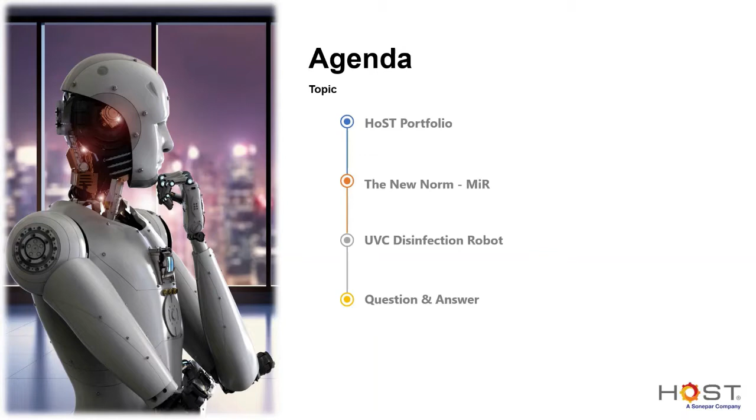Okay, so here we go. For those who have not heard about us before or have been wondering why we are called Host, Host was set up by Mr. Ho Soo Tin. That's where he came up with the name Host, H-O-S-T. He brought Allen Bradley from the US to Singapore in the early 1980s and set up the company in 1990 as Host Enterprise. Since then, we have been the distributor for Allen Bradley products, which is now known as Rockwell Automation. We are their exclusive distributor, which all technical and commercial matters on Rockwell Automation products goes through us locally.

Some of the key milestones: in 2014, we joined the Sonepar family and expanded our distribution network as one of their global operational companies. In 2018, we realized that the industry is evolving and we are going to evolve together as well, by offering more products and solutions. We changed our logo and added portfolios like robotics back then in 2018.

An overview of our parent company, Sonepar. Sonepar has been around for more than 50 years. In 2019, we achieved 24 billion euros in group sales with 48,000 associates worldwide, 3,000 branches in 48 countries. We are one of 145 operational companies globally focusing on distribution of industrial automation and electrical products. Currently, we still hold the position of world leader in B2B distribution of electrical products and solutions globally.

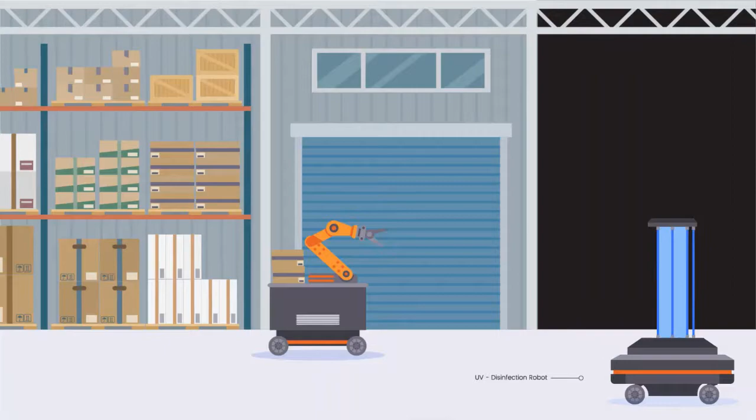Three decades of experience in industrial automation has made Host, part of Sonepar Group, the trusted and leading partner of companies looking for holistic solutions to their industrial needs. Businesses like yours no longer need to rely on expensive and cumbersome manual processes. With our cutting-edge solutions on carbon footprint reduction, energy management, production and operation, smart manufacturing, robotics, network, cybersecurity, we deliver customer-centric value to address evolving business needs. Get work done quickly. Contact us today.

This is the last slide of the introduction. We have currently moved 2 years ago to a bigger place, joining our 3 other Sonepar operational companies in one office. Now I'll hand over to Clement from MiR to talk to you about the new norms.

Clement has more than 15 years of experience in the automation industry, and he specializes in robotic applications and safety systems in his previous career. So Clement, please.

Good day, everybody. Many thanks to Host who organized this webinar, which is pretty much relevant to the situation nowadays that we are facing with regards to the COVID-19 situation. Therefore, very much appreciate that.

And I'd like to talk about our MiR autonomous mobile robot.

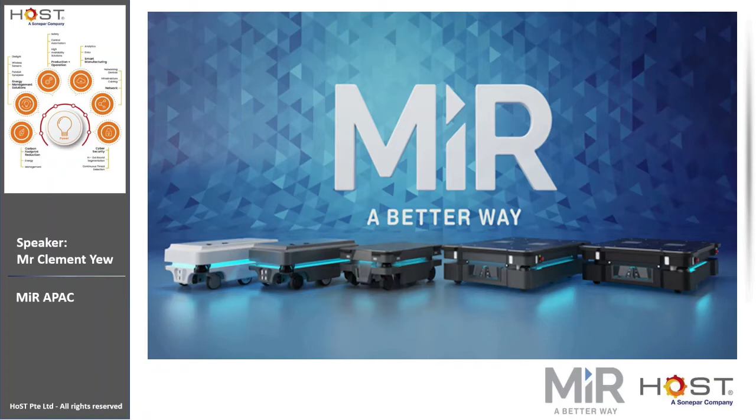But there are also cases where the COVID-19 rises again. That's actually happening in Australia.

So they extended the lockdown. They reinforced the lockdown as well. So therefore, new norms have been created due to this situation. So what are the new industrial norms due to COVID?

If you look at the exhibitions nowadays, these are all being cancelled, especially for the very famous ITAP show, Semicon show. These are all being cancelled. However, digital media marketing has taken place more, which has overtaken such roles for marketing purposes.

In terms of meetings, I think most, if not all of us, have already been using Zoom or Teams as a platform to do online meetings as well. And the frequency of cleaning in the workplace or in public venues has been more and more frequent, and actually it's quite intensive for workers to do it.

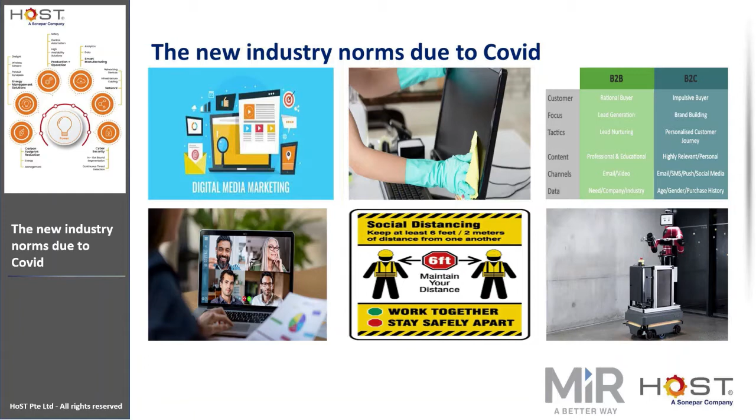But is this new norm really new to the industry? I think this is the biggest question. In my perspective, as we are all industry people, I think Industry 4.0 is no stranger to all of us.

And when we talk about Industry 4.0, we talk about autonomous systems. When we use autonomous systems, it means a less labor intensive production environment. And when we talk about a collaborative system as well, this is to ensure that less humans are involved, because some of the labor work is inevitable. Human involvement must still be there. However, whenever possible, collaborative systems will be implemented to ensure this.

So this can actually ensure some social distancing. Safety is always the top priority, whether it's COVID or not, where machines coexist with human beings.

In terms of data analytics, when we talk about contact tracing, basically we are talking about traceability, track and trace purposes, which is a requirement for Industry 4.0 as well. And the system will need to be flexible and scalable as well. So machines should be of an open interface.

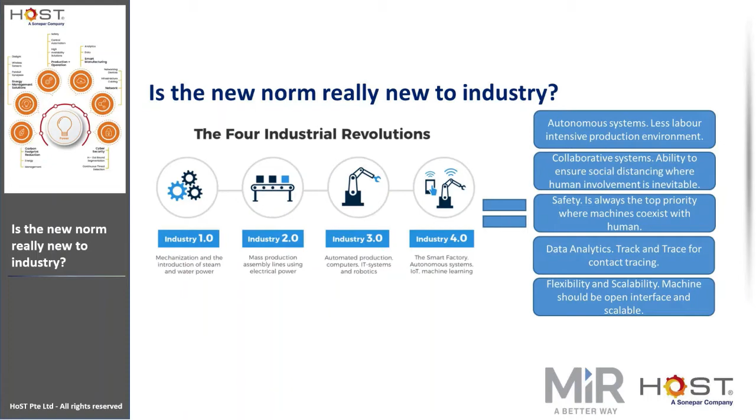And with that, let me bring you to a short video to show how MiR actually addresses this in the industry.

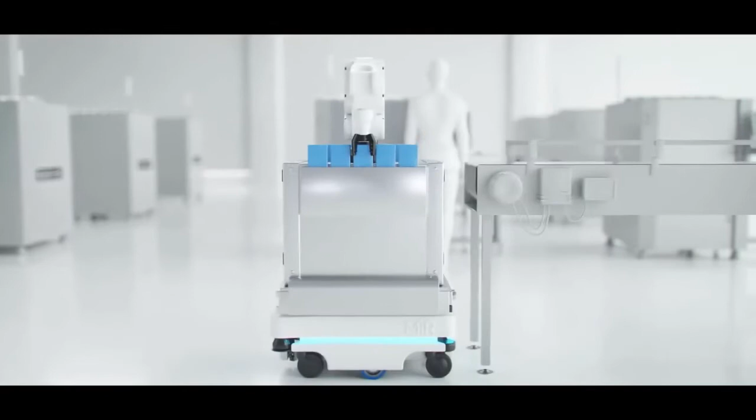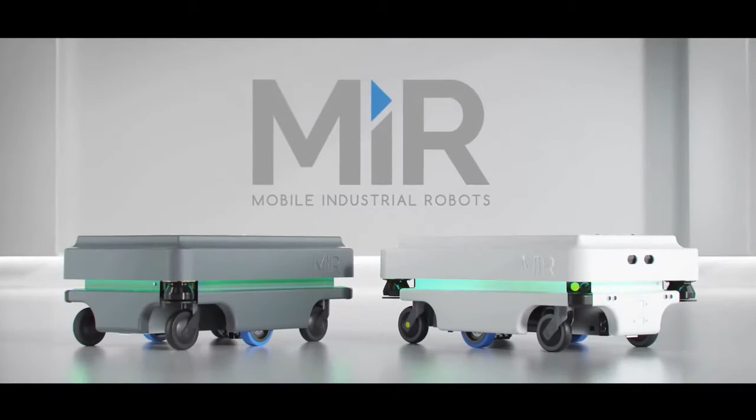Imagine a fleet of collaborative mobile robots that could optimize your workflow, increase productivity, and reduce costs. What if it was 100% automated and could collaborate with employees? And what if it was fast and easy to integrate into any type of factory layout? Sounds like something from the future, right? Actually, it isn't. Let me introduce you to Mobile Industrial Robots, MiR, an efficient and flexible mobile industrial robot solution.

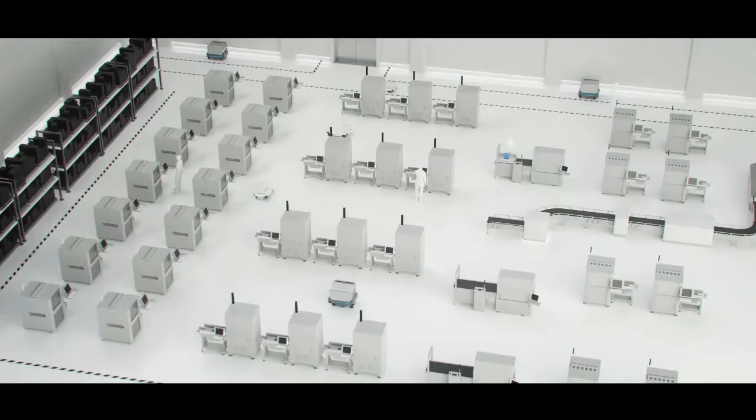So how exactly does the MiR fleet work? Let's have a look. Now the employee here would like to send the item he's just finished working on to the next production line. With the press of a button, a MiR robot is summoned. Once the button has been pressed, a signal is sent to the MiR fleet management software. The fleet management software runs behind the scenes and manages all the MiR robots. The system automatically instructs the appropriate robot to navigate to the source point.

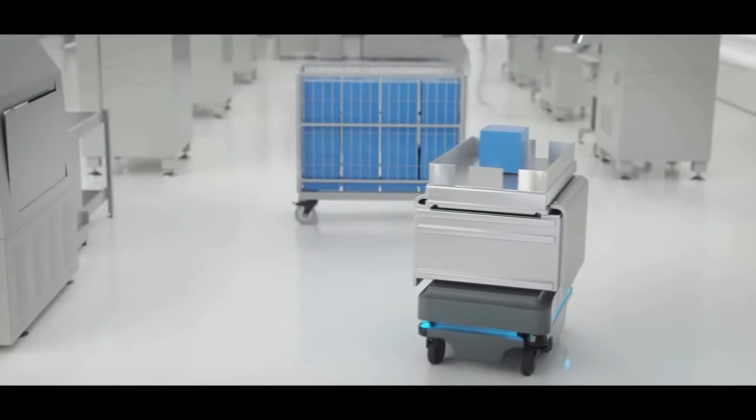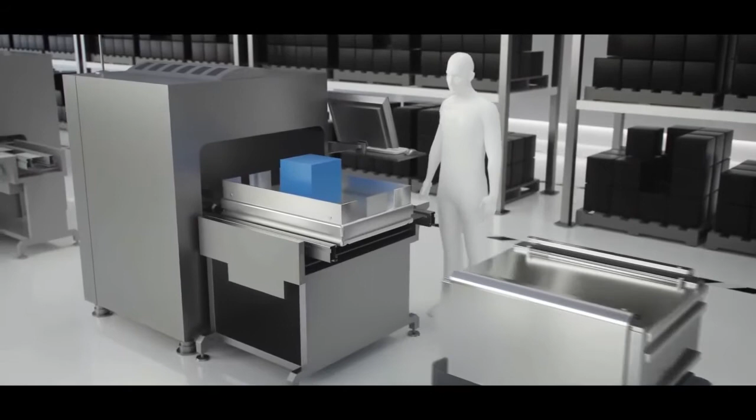The item is placed on the robot and is ready for transit to its destination. The robot drives 100% autonomously and can easily navigate around obstacles on its way. The fleet management software automatically adjusts traffic in real time, ensuring that everything runs smoothly and efficiently. Now the robot has delivered the item to its destination. If there's nothing else in the queue, the robot can be set up to automatically park in a preset parking spot and recharge.

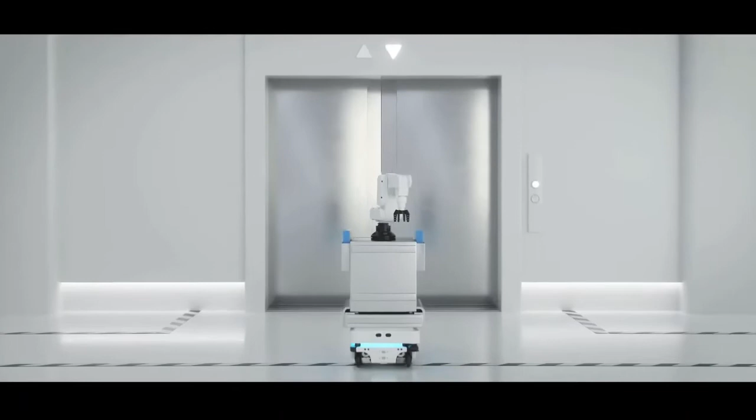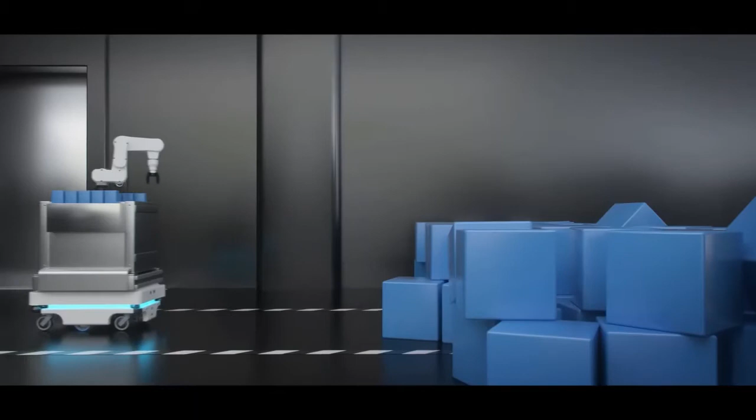The robots can also be summoned via tablet, automatic communication from production lines, or via your ERP system. You even have the possibility to create rush orders that are placed at the front of the order queue. Because the robots drive autonomously, they can perform complex maneuvers, such as navigating across multiple floors. If a robot encounters an obstacle that it can't navigate around, a notification is automatically sent to the user that an action is required.

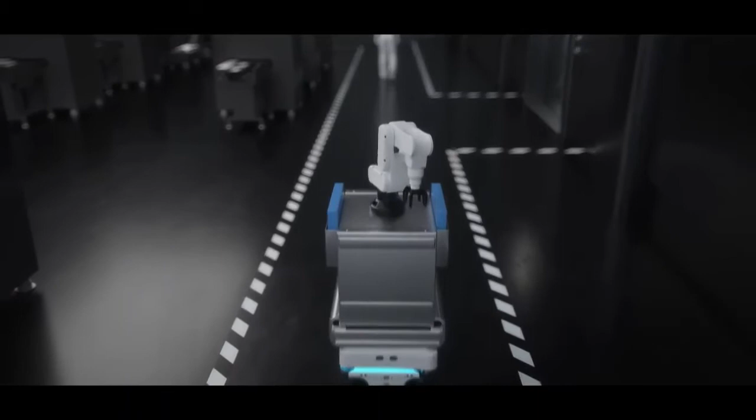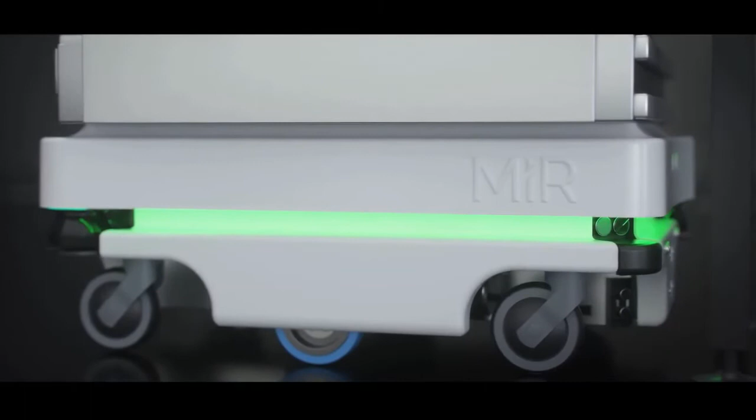When the item has reached its destination, the robot automatically sends a notification. The top modules are easy to change, so the robot can be redeployed for different tasks. Whether transporting small, medium, or large items, we've got the solution to automate your internal transportation and logistics.

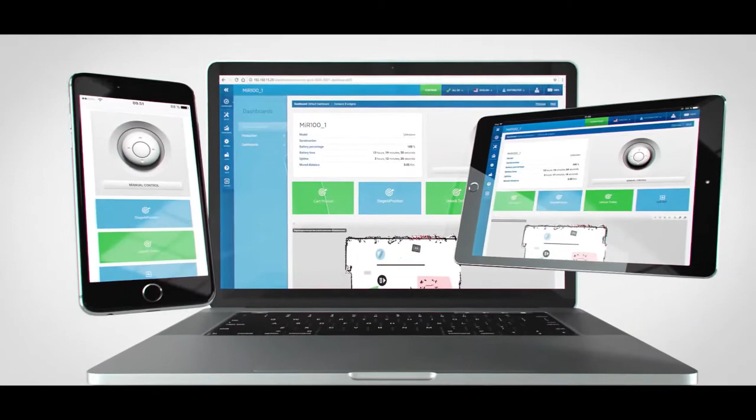Programming the MiR robots is simple. The user-friendly and intuitive interface allows for fast and hassle-free implementation. And you get customizable dashboards that make it easy for you to tailor the interface to your individual needs.

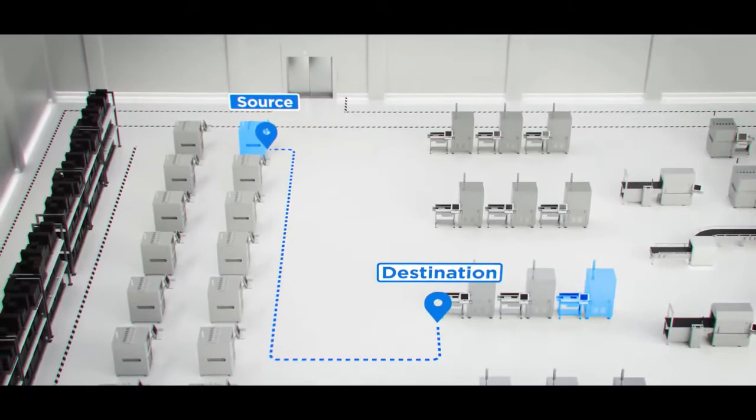At MiR, we know that factory layouts change rapidly. That's why we made it easy to reprogram routes. A few clicks and you're ready to go. It's that simple. MiR is one of the fastest growing companies in collaborative robotics.

Our solutions are used all around the world and are helping companies to increase productivity, profitability, and to streamline workflows. Contact us today to learn more about how we can help automate your factory layout. MiR Robots.

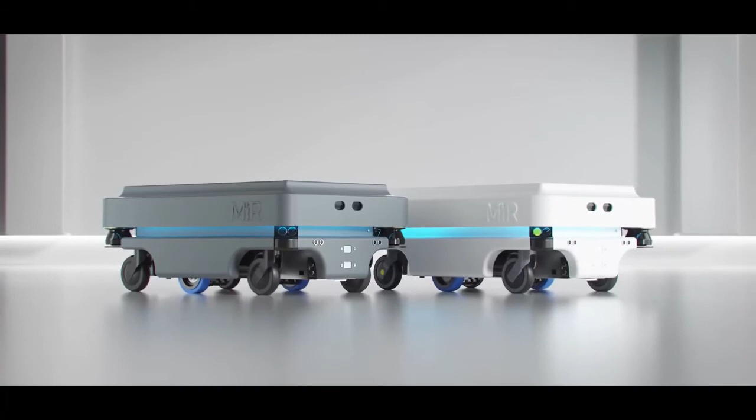So therefore, I bring you to an introduction of MiR. We actually have 5 models: MiR100, MiR200, MiR250, MiR500, and MiR1000 for payloads of 100 kilogram all the way until 1000 kilogram.

For MiR, we are actually the world's most safe and reliable autonomous mobile robot maker. And everything we do is actually very much based on collaboration, adaptability, and performance.

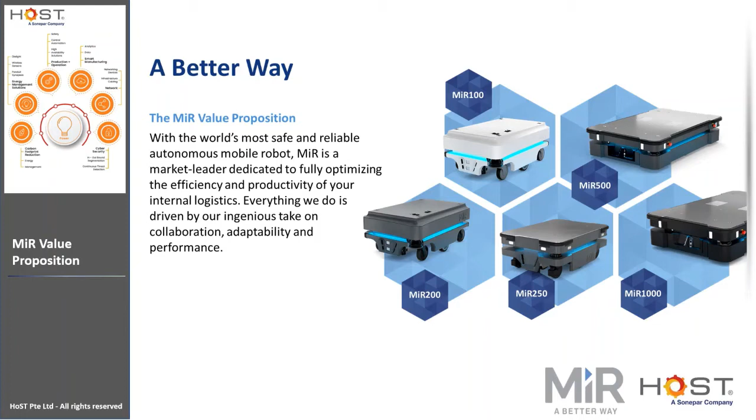So what's the difference between AMR and AGV, which is a term normally used in the industry? Well, for AMR, we are basically trackless. We use autonomous navigation, where AGV actually requires tracks, such as magnetic strips on the floor or wires. For AMR, we can safely travel around people and obstacles. But for AGV, the problem will be whenever there's obstacles, it will stop there. Unless the obstacles are being removed, it will still continue to stop there. And that actually brings down the productivity and efficiency.

For AMR, it's very easy to expand and very easy to change your work area because it's all about mapping. Whereas for AGV, it's more expensive because you need to relay all the magnetic strips or wires around the floor area, which can be quite tedious as well. And for AMR, we actually navigate dynamically while planning its own path and sequence, whereas the AGV is restricted to fixed routes and control sequence.

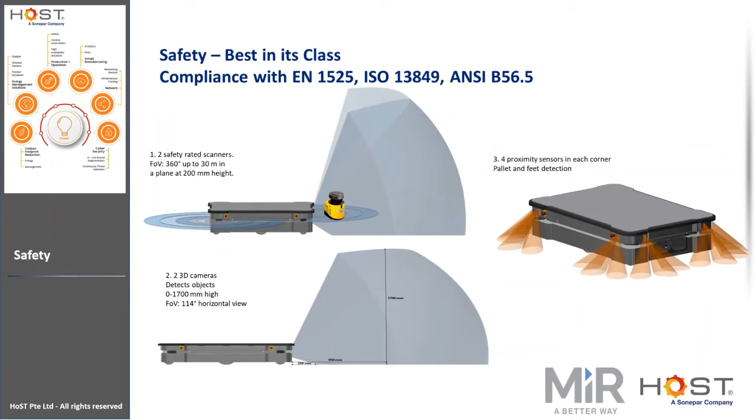As mentioned, we class ourselves the best in safety. Why? Because we are, as far as I know, the only AMR maker which has 2 safety rated scanners, able to detect 360 degrees for the AMR. We also have 2 3D cameras that detect objects like overhanging obstacles. We also have proximity sensors at each corner of our AMR.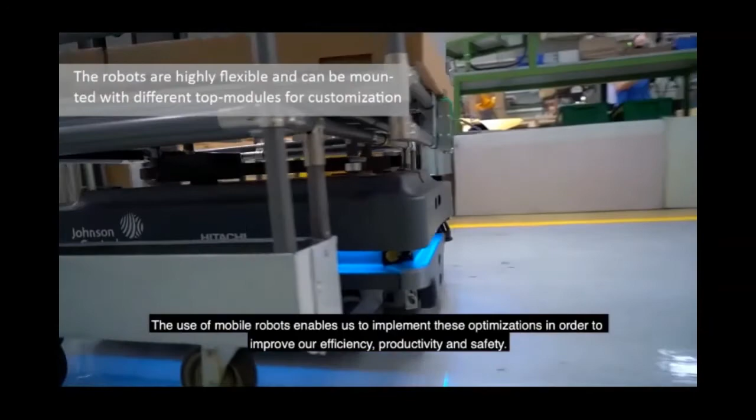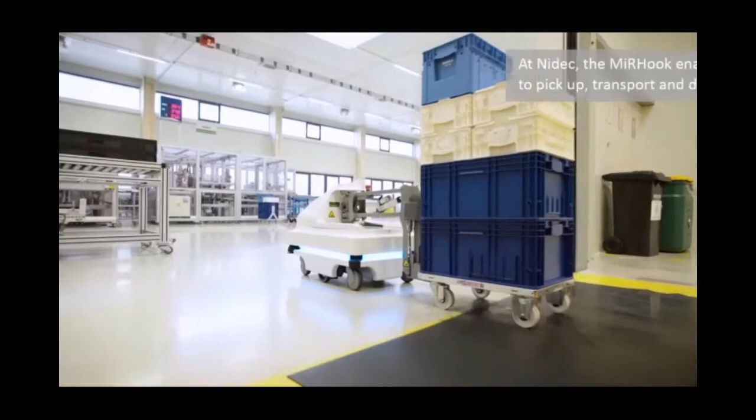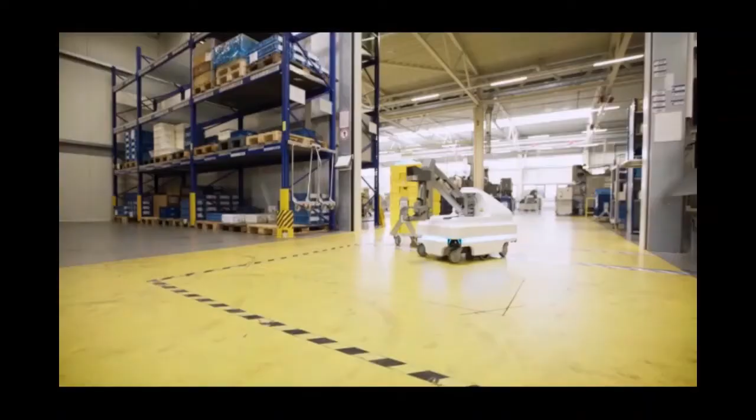The use of mobile robots enables us to implement these optimizations in order to improve our efficiency, productivity, and safety. Our MiR robot automates the transport of raw materials to one of our latest assembly lines. So we came across the mobile robots from Mobile Industrial Robots. They immediately convinced us with their great flexibility. Since then, Nidec GPM has deployed 3 MiR100 robots. They autonomously transport material and empty containers between warehouse and assembly.

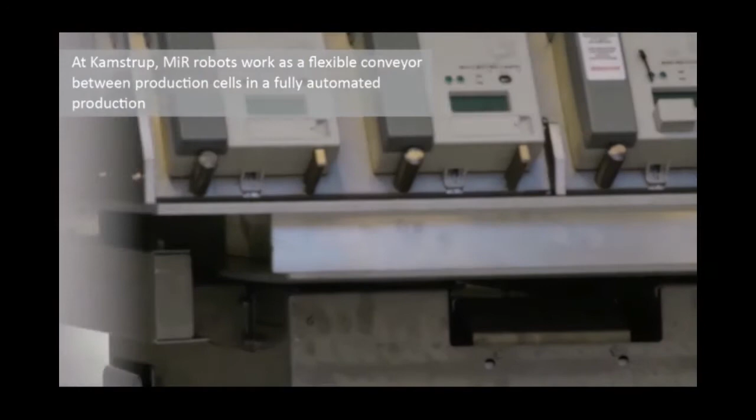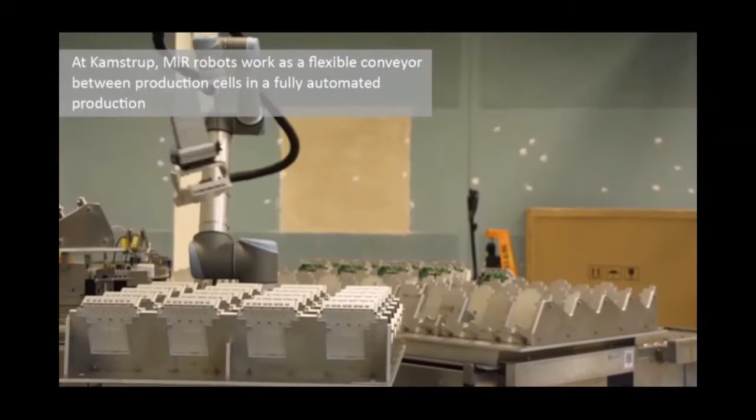We use MiR as a conveyor belt. We use it to transport our semi-finished products and our finished goods, from production cell to production cell and from line to line. There are no people involved in producing the high-volume products. This means we are very dependent on the MiR being able to deliver items to a robot, which in its turn can deliver items to the MiR.

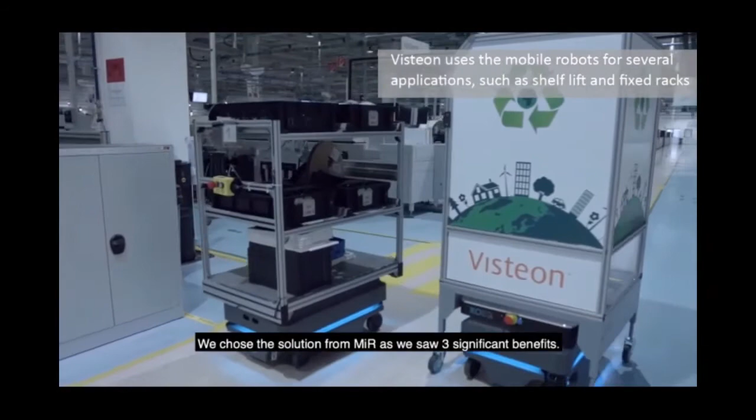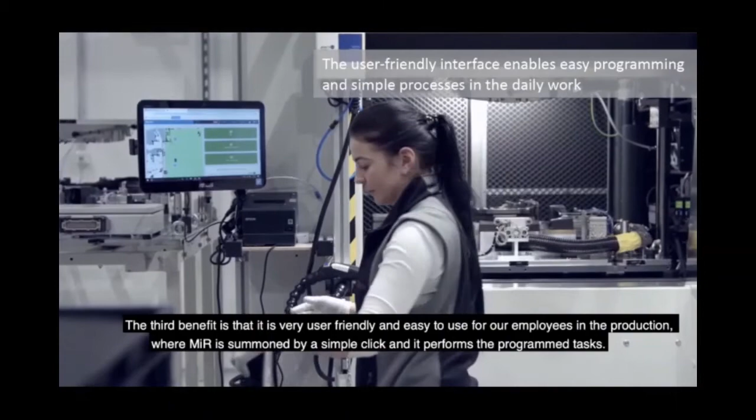We chose the solution from MiR as we saw three significant benefits. First of all, because of its high flexibility, the robots can be used in various production processes. Another benefit is the programming, which is easy and intuitive. This means we don't need a specially trained expert to use it; it can be managed by a regular employee. The third benefit is that it is very user-friendly and easy to use for our employees in production, where MiR is summoned by a simple click and it performs the programmed tasks.

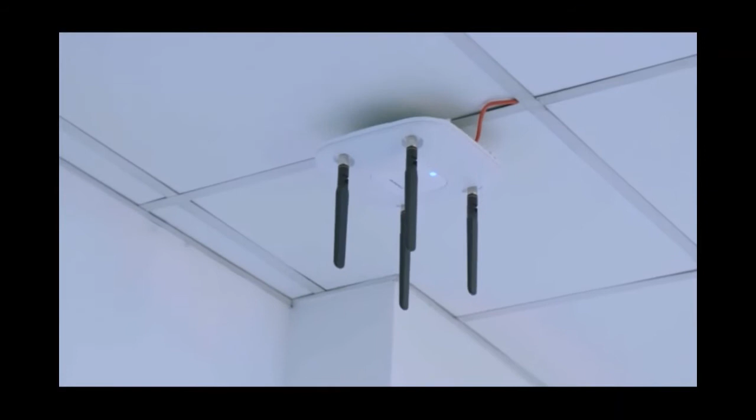So it's really important for us to be able to have the robots automatically open the doors, which was done via Bluetooth interface. We also needed to get the robots to be able to use the lift, so fleet controller and having the robots be able to automatically control the lift was a really big thing for us.

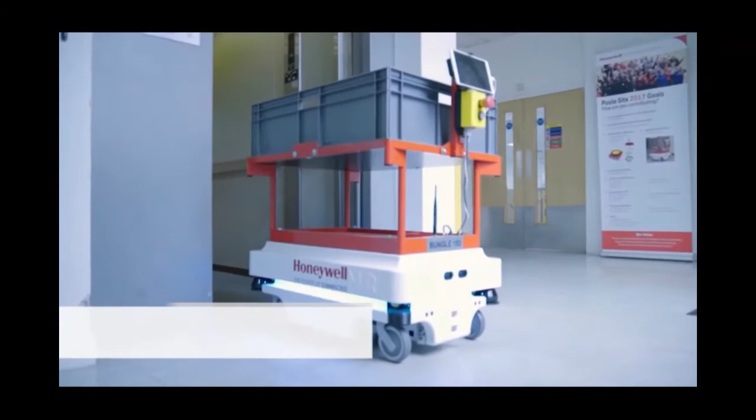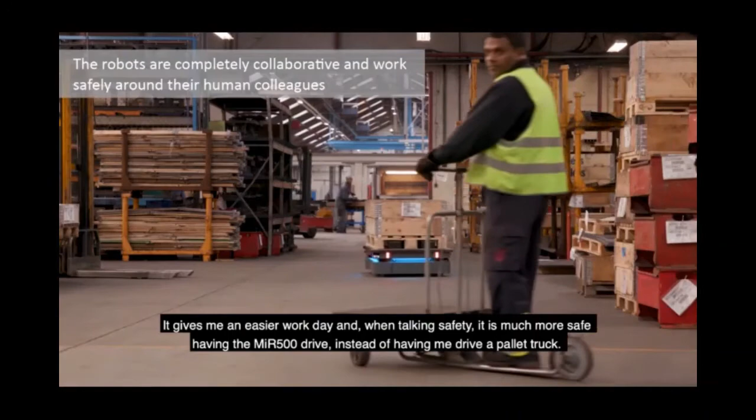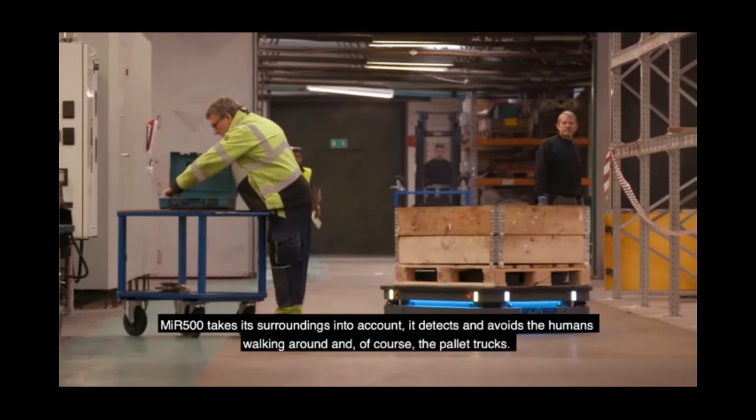It gives me an easier workday, and when talking safety, it is much more safe having the MiR 500 drive instead of having me drive a pallet truck. This is especially regarding collision and other things that might happen because we drive so far. The MiR 500 takes its surroundings into account. It detects and avoids the humans walking around, and of course the pallet trucks.

And I think without a doubt, the most prominent and important new norm is the very high frequency of disinfecting the workplace and public venues as well.

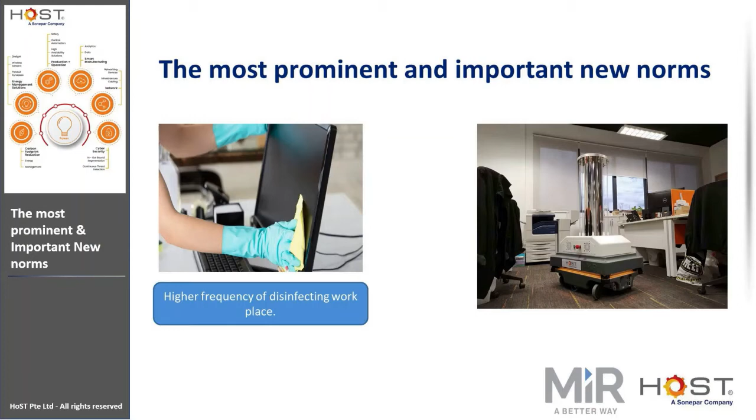So after hearing from Clement on the new norms of the way of life we are in now, we need to adapt and make precautions to enable everyone to be safe. Presenting the UVC disinfection robot from Host, which is co-designed by our partner. This can be used in many different environments like office spaces, retail malls, plant floors, hotel rooms, in the hospitality industry, you name it. This will be placed in places where we need to keep people safe.

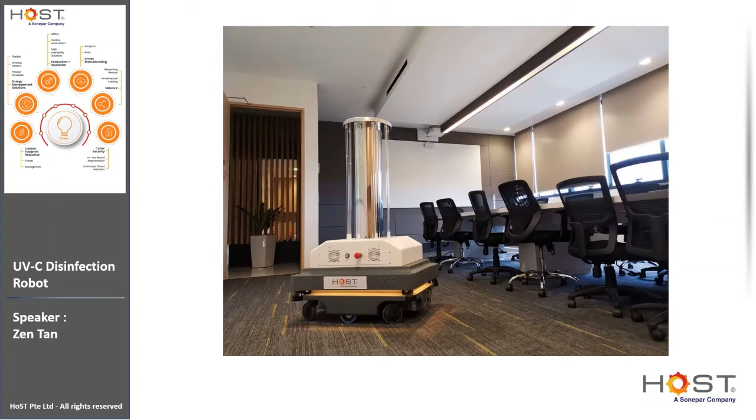I think everyone has the dying question: how do UVC kill and disinfect or inactivate pathogens? So ultraviolet light is in between the spectrum of X-ray and visible light. It cannot be seen by the naked eye. UV rays are separated into three different bands, namely UVA, UVB, and UVC.

Each of these have different wavelengths. UVA is between 320 to 400 nanometers. UVB is from 290 to 320 nanometers. And for UVC, it is from 180 to 290 nanometers.

UVA and UVB are responsible for causing your skin to get darker when you go to the beach to have a suntan. UVC is absorbed by the atmosphere and is not found on the surface of the Earth. About 30 years ago, scientists found that there are properties which can be harnessed from this wavelength, therefore calling it the ultraviolet germicidal radiation.

So the specific wavelength that we are going to use in UVC is 254 nanometers. So how does it work? For pathogens, the way to survive and to propagate is to reproduce. It scrambles the DNA and RNA of the pathogens, leaving them unable to reproduce, therefore dead.

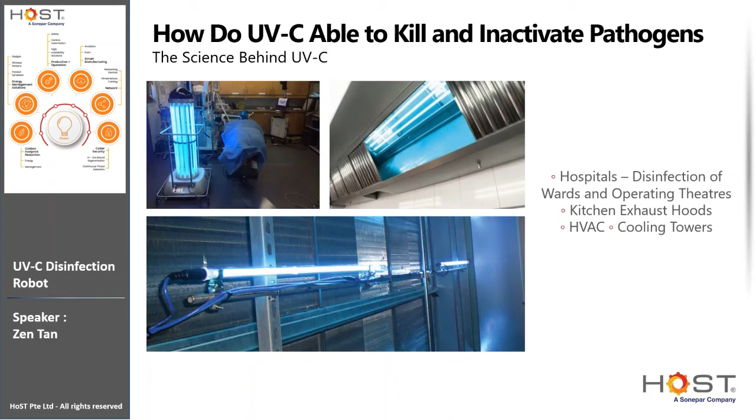There are several other ways of disinfection out there. Comparatively, people use hydrogen peroxide vapor machines, or HPV in short, to disinfect areas. This machine, which you load up with a hydrogen peroxide canister, will create vapor to fill up a room or an area.

The process time for using the UVC robot is much shorter. It can clear about 1,000 square meters of area in an hour. For HPV, it takes about an hour for just a meeting room. So for the cost, which is the very big question, the UVC robot costs less, as HPV machines are a long-term investment—you need to continue to buy the solution in order to continue to disinfect different areas.

For biocidal targets, HPV is slightly better than UVC as it has been around for ages and there are many research studies on the biocidal targets it can kill. The UVC robot can reach and expose surfaces or areas which the robot can go, but for HPV, it can only be used in enclosed places like a room. It will not be very useful in a wide open space.

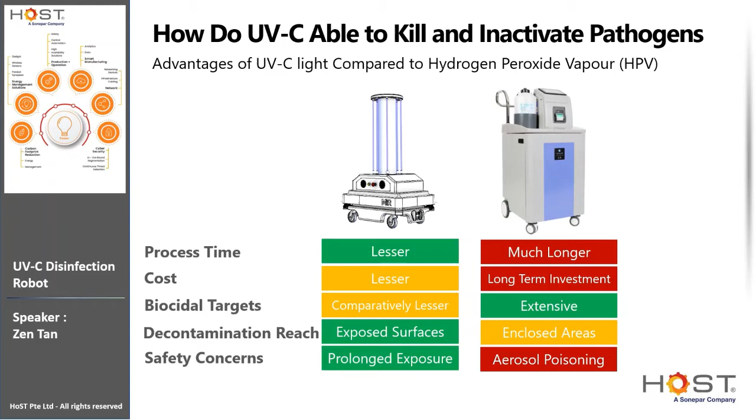Specifically for coronavirus or COVID-19, many research papers have been done since the 1980s on the use of UVC on many pathogens, and specifically on coronavirus. There are many types of strains that they have tested and required exposure to kill at 99% confidence, and the magic number is 67 joules per meter square.

We will use this exposure level as a minimum when we do deployment and give you a commissioning report. We use a UVC exposure meter to take the readings and ensure that it has met this minimum amount of exposure to prove the efficiency of the robot.

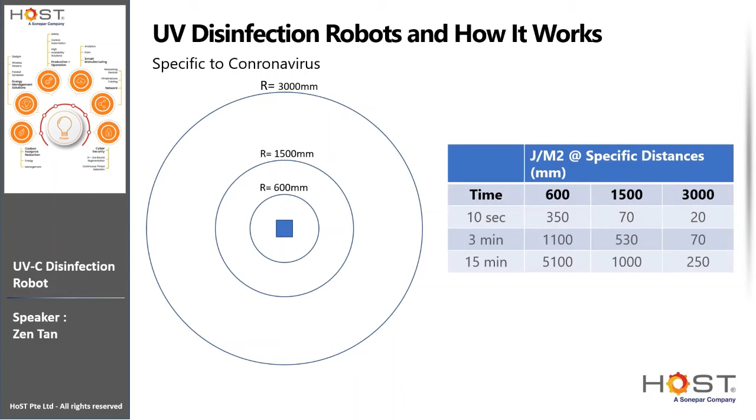So how we do the deployment and what you need to take note of: we will do the mapping of the entire area which you require to disinfect, and these maps will be saved in the robots. Then we configure the areas to disinfect and which areas are forbidden, like places that you do not want the robot to go to, such as stairways, escalators, or rooms that you do not want the robot to enter.

We can set a scheduled timing for the robot to disinfect, for example, every 2 AM at night. And we are done, good to go. We will give you the report of the exposure data once we do the commissioning and deployment of the robot on site.

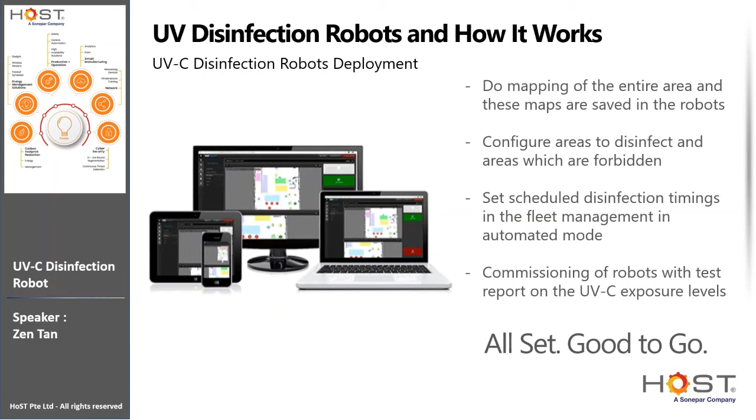There are two modes of operation of the UVC robot. Number one is the automated mode, which I mentioned just now, where you can set a scheduled time and it will automatically go and disinfect the areas. There is also a manual mode.

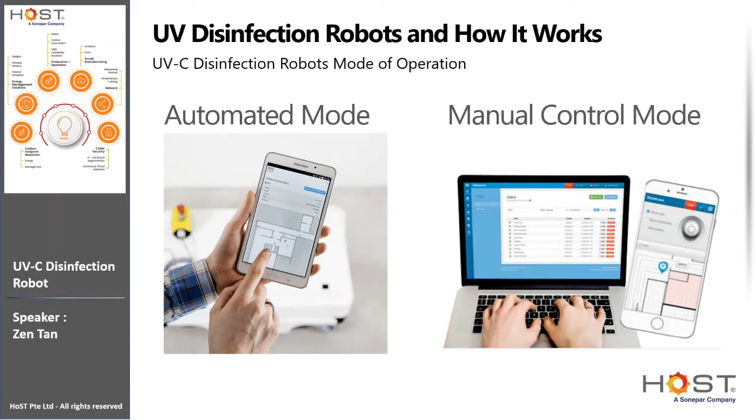Say you have an area which you know has a potential infected person who has touched something or visited. You can manually drive the robot to the specific area and switch on the UVC lamps to disinfect. Operational manuals and training will be given to your operators as well.

The technology that we use is all certified. The UVC lamps are certified by EPA, the Environmental Protection Agency in the US. And for the robot base, it is ISO 13849-1 certified for machine safety.

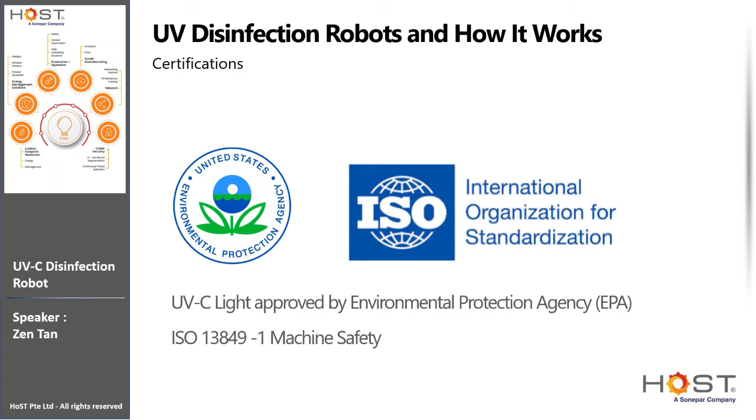So a quick recap on what I have gone through: the UVC robot is able to disinfect large areas in a short amount of time, and you do not need to worry about inconsistencies of cleaners wiping down surfaces. It is fully autonomous to do scheduled disinfection. It is easy and fast to deploy, and it meets safety standards and certifications.